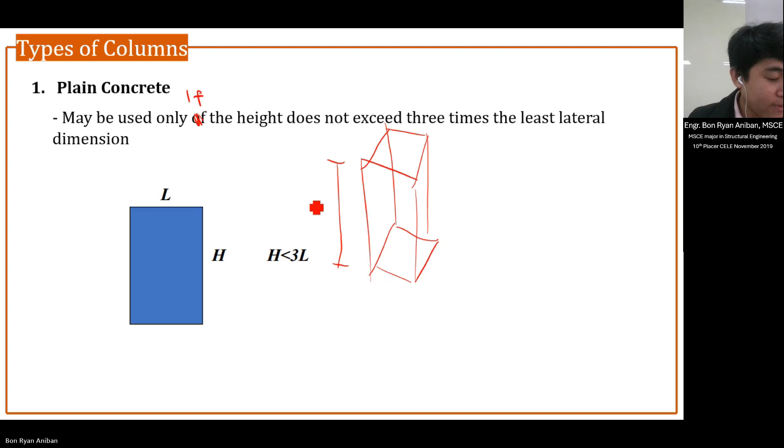We have plain concrete, used only if the height does not exceed 3 times the lateral dimension. For example, you have here a certain column, and if this height does not exceed 3 times the lateral dimension, whichever is lower, so if H is less than 3 times L, that could be considered as plain concrete. You don't have to put any reinforcement.

Longitudinal bars, you don't need to put lateral ties either. So usually it's called pedestal. Concrete pedestal, you don't necessarily need to put any reinforcement.

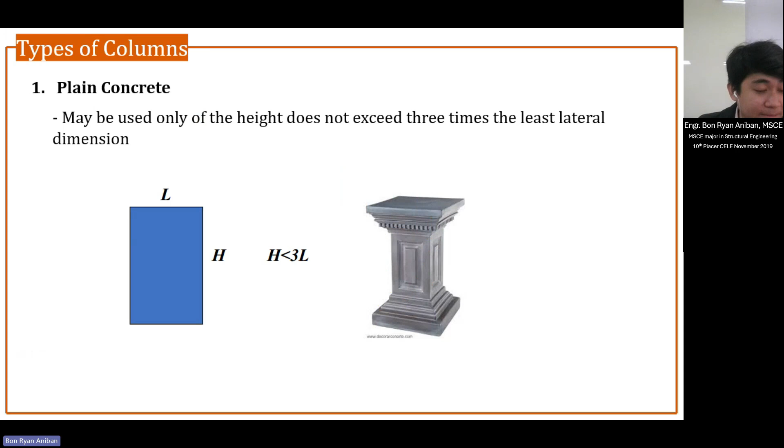We also have tied column, which is already the reinforced column. So earlier that is plain concrete, now this one is a reinforced column. We have a tied column in which the longitudinal bars are braced with a series of ties.

So this is your longitudinal bars, and then you have a series of ties. Parang stirrups ang katumbas niya, class, doon sa ating reinforced concrete beam. So we have different ways to put the lateral ties.

So we have these closed ties. We also have here ties doon sa mga interior na longitudinal bars. But we can also create a tie column na circular. Circular, so yung ties nila is also circular ties.

So a tied column composed of series of ties, kaya tied column. On the other hand, we also have spiral columns, a column in which the longitudinal bars and concrete core are wrapped with closely spaced helix or spirals.

So earlier, class, yung ties ay close hoop lang siya. Ngayon, ang spiral is actually continuous, continuous yung ating spirals, with closely spaced helix.

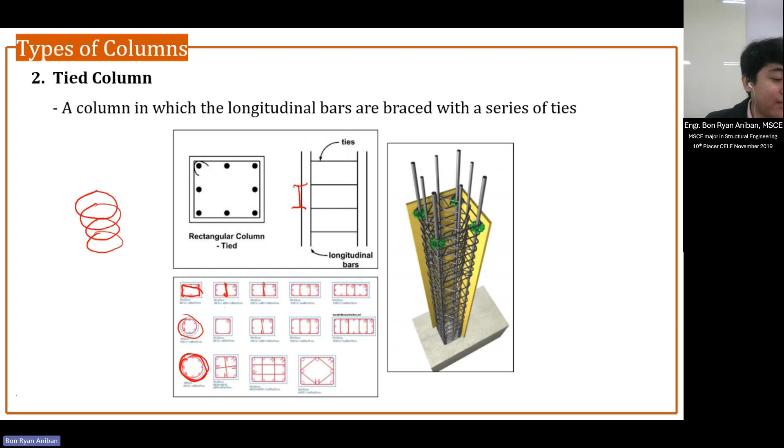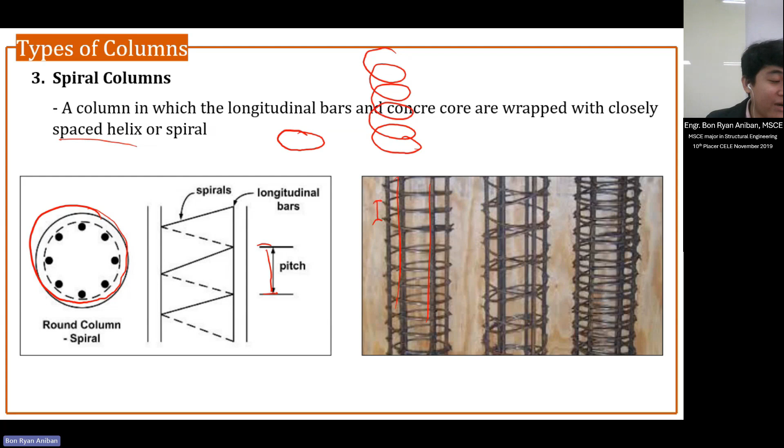So again, for this topic, we're going to solve the longitudinal reinforcement and the spacing of this transverse or lateral reinforcement. We also have composite columns, but we are not going to discuss composite columns here in reinforced concrete.

This topic will actually be discussed in steel design, class. So because this is a combination of reinforced concrete column and steel members. Minsan nasa loob siya, usually talaga nasa loob siya, tapos papalibutan mo siya ng concrete sa labas para hindi rin mangalawang, para hindi siya ma-expose doon sa environment.

Of course, this is stronger than steel alone and than concrete alone. So yun yung composite columns.

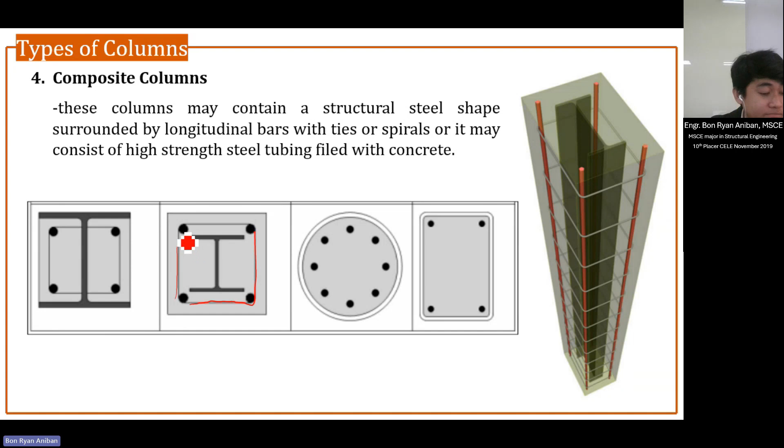But how do we design reinforced concrete columns? On the design of columns, the capacity must be greater than the factored axial force. It should be greater than the factored axial force. So we're done with this.

Design of beam flexure, we're done with this. Design of shear reinforcement, and this one, torsion reinforcement. So this is the only one left for us, class.

Okay, for the design strength, the capacity must be greater than the factored loads PU. So we know how to calculate the PU from your frame analysis, from your structural analysis. You can identify the actual load acting on your column.

Let's say you have a frame, a portal, that is simply supported or fixed. Basically your goal is to get, as you cut this section, the reaction at the support. At the reaction at the support, you have here an axial force acting here.

Okay, let's say we have a two-story structure. Which you will do on your plate. You are going to analyze it, cut this portion, and expose the internal forces acting on the endpoints of that column. So axial forces, kasi yun yung kailangan natin i-design. Actually, beam also experiences bending and shear, column also experiences bending and shear. But for now, we are only considering for the design the axial force lang, ibig sabihin walang bending moment, or we treat the column as simply supported.

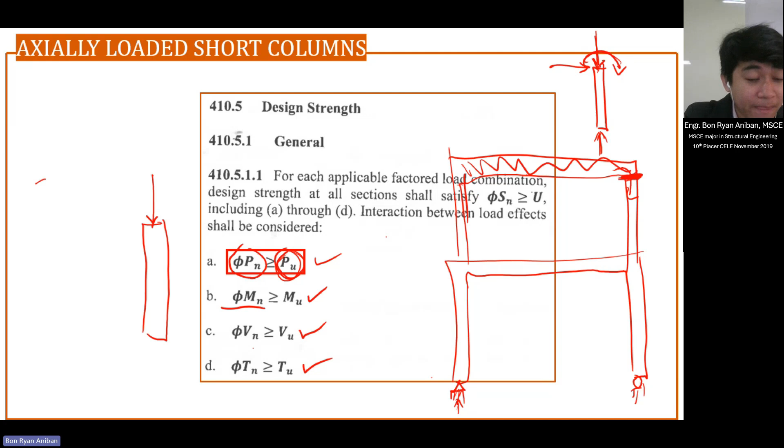Kasi kapag fix yan, guys, tulad nito, continuous yung buhos. Usually kasi pag gagawa ng structure, ang buhos ng beam ay sabay doon sa column. So they are monolithic, therefore the connection is considered as a fixed support. So therefore, there will be a moment between the framing, between the connection of your frame, column, and beams.

So saan lang meron talagang axially loaded column? Yung mga simply supported beam. Pag nag-transfer kasi yan ng load, okay, it is treated as a column. So yung reaction dito, class, is axial force lang doon sa ating column. So ano yung mga structure na yon?

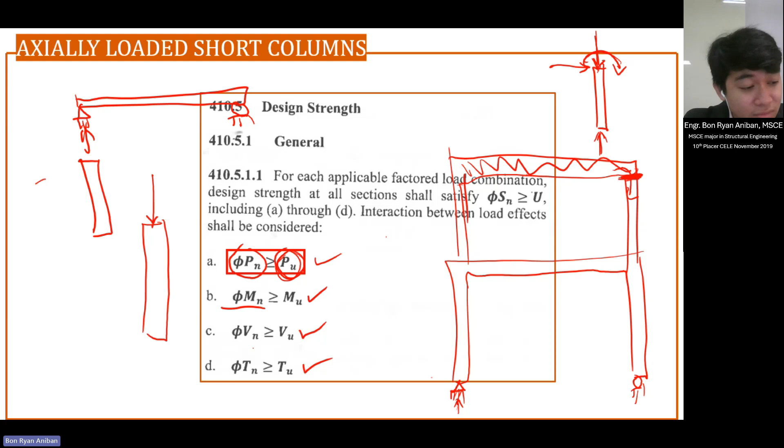Na may column ka, tapos pinapatong lang yung mga beam. Okay? So what do you think, yung mga ganong structures, guys? Do you have any idea kung ano yung ganong structure, yung ipapatong lang yung mga beam doon sa mga naka-ready na column. They are not monolithic, ha? Nakaabang na yung column. So what do you think, class, anong type ng structure yun?

Skyway kasi, yung mga skyway na yun, class, yung mga beams dyan is pre-fabricated. Dadali niyan dyan, buo na. So ibig sabihin hindi siya monolithic, may nakaabang na lang na bakal dyan. Tapos yung butas nito, hindi siya yung butas ng beam mo na pagpapasukan ng bakal, may konting gap yun, hindi saktong-sakto yung hole doon sa rebar na papasukan, may mga nakaabang na rebar dito. Therefore, it has a tendency to move horizontally, so may allowance siya to move horizontally, and that is a simply supported.

Okay, so kaya yung mata-transfer doon sa mga column class, yung mga column na dinesign sa mga skyway na yan, sa mga bridges also. Bridge, simply supported din yung class. Ano pa ba? Yung mga LRT, yan, yung mga train tracks. So yung mga elevated train tracks, simply supported din yung mga beams nun. So yung mga column nun, class, only resist axial force. Yung mga column nun magkabilaan yun actually, di ba? Mga column nun may papatong dito na beam, beam dyan sa kabila. So they only resist axial load, or the load is directly acting, okay, on your column. Axially loaded column, yung mga ganun class.

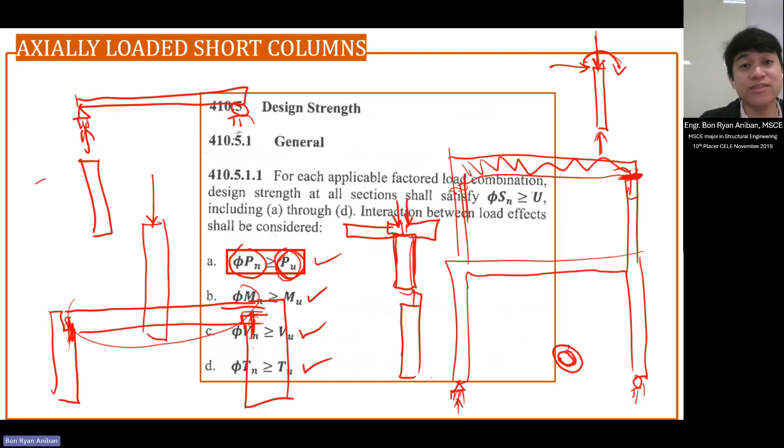But if you are going to analyze a structural frame, analyze ka ng bahay, moment resisting frame, so there will be a moment doon sa mga end columns natin. Okay, so that will be discussed doon sa mga susunod pa nating meeting. Okay, so you already know, no, the difference of what is axially loaded columns. Kasi we also have eccentrically loaded columns, yun ay may moments.

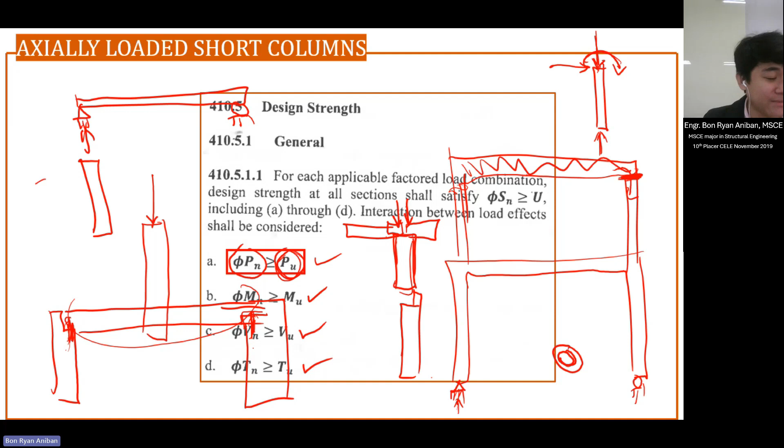So now, how do we design? How do we design that capacity? The capacity of the axially loaded column must be multiplied to the reduction factor. So what is the reduction factor for purely axial column? Purely axial, wala pa tayong bending moment. So for the purely axial column, of course for spiral column...

...that is 0.75. And then for tied column, itong other refers to the tied column. Okay, so lista lang natin. So for phi Pn, okay, the value of P, at least gawa tayo ng list, guys, for tied column and for spiral. Okay, for the reduction factor, okay, for the tied column is 0.65. Now for spiral, 0.75. Actually, this table was already presented, okay, during the discussion of the beam.

Kasi ito rin yung ating reduction factor. Okay, so di ba may compression control section for beam, tension, transition, tension? Kasi beam is subjected to moments, no? So dahil sa moment na yun, nag-iiba-iba yung strain ng ating reinforcement. However, for purely axial, yung strain mo dun sa reinforcement, yung mga bakal mo, is actually being compressed, so they're purely compressed. That's why your strain, tensile net strain, is less than the yielding but in compression.

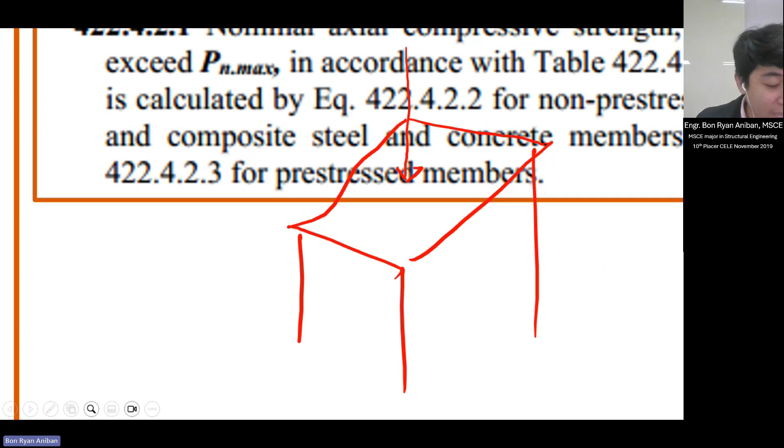So how did NSCP came up with this formula? Now let's check, kasi this is axial capacity, no? Since this is purely axial, therefore the resisting forces will be on the entire area of your concrete.

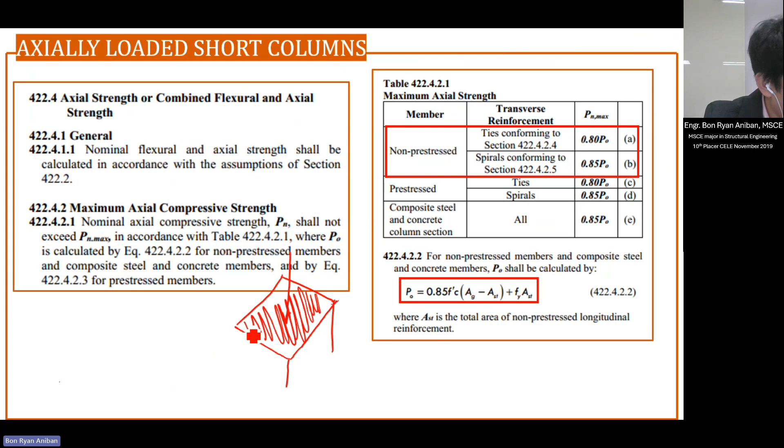Now, if this is subjected with the axial force, so the cross-sectional area will resist. So ano yung magre-resist dyan? Yung pure area neto, guys. Yan, yung buong area niyan yung magre-resist. So paano ba yung force given by this area? Diba that is stress times the area? You know how to do this, no?

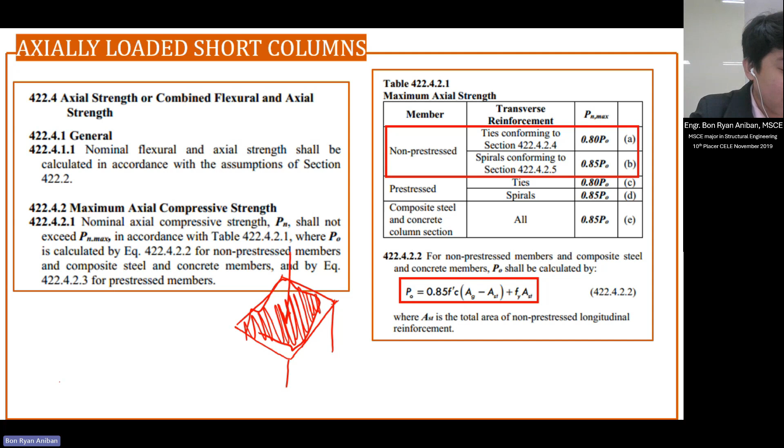From the analysis of singly reinforced and doubly, stress times the area. So what is the stress being experienced by the concrete? Diba, we have to have a uniform stress. Okay, that is 0.85 FC prime times, ano ba yung area nito? Area ng gross. Okay, so from beam, that is 0.85 FC prime BWD, di ba? Dito, we use area ng gross.

Eh sir, bakit minusan ng AS? Because that is to account, kasi may butas yan eh, di ba, dahil sa mga steel, area ng steel. Hindi naman talaga buong area ng concrete to eh. Okay, may bawas na yung concrete natin because of the area of the steel reinforcement. So you have to reduce it by the area of steel, area ng gross minus area of steel. Kaya yung total force given by the concrete is 0.85 FC prime, area ng gross minus area of steel.

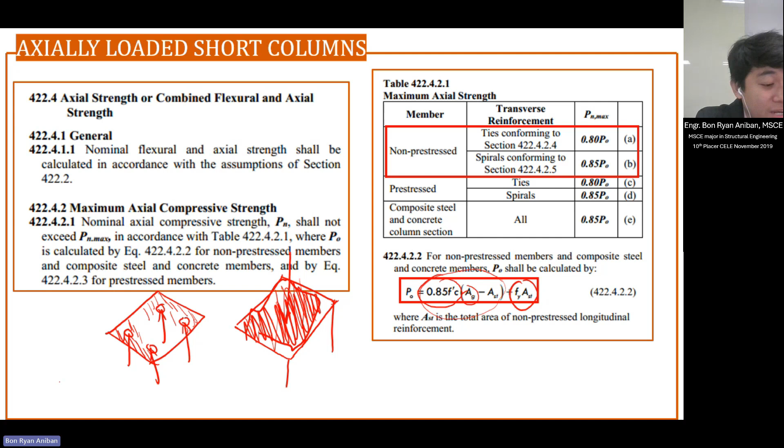Then, since yung force aside from the concrete, magre-resist din class yung area of the steel. May binibigay din forces yung mga steel. Okay, but how do we solve the force given by the steel? Diba AS Fy? So we assume that this is already yielding, yielding in compression. Okay, so yielding sila in terms of compression. So AS Fy, that's how we get the capacity PO.

Okay, parang ito class yung 100% capacity. But for the safety purposes, kasi when there is an eccentricity, okay, halimbawa, yung ating force, halimbawa 100 kilonewton yung na-count natin. But that one, halimbawa, nandito yung 100 kilonewton. But that 100 kilonewton is not actually directly acting on the centroid of your cross-sectional area. So therefore, that 100 kilonewton is more than that, no?

Hindi talaga siya 100 kilonewton. Kasi kapag nilipat mo yan doon sa centroid, for us to have a uniform stresses kasi, dapat yung force mo is acting to the centroid. Now, therefore, kung ililipat natin yan dito, magkakaroon ng eccentricity, so there will be a small moment acting.

Now, to account that moment, to account that eccentricity, ang gagawin natin, we assume that the capacity is smaller than the actual 100% capacity. So you multiply your 100%, this is actually the 100% capacity of your axially loaded column, with some safety multiplier. So 0.8 for tied, 0.85 for spirals. So imagine, 20% yung nabawas sa tied column, and for spiral is 15% only.

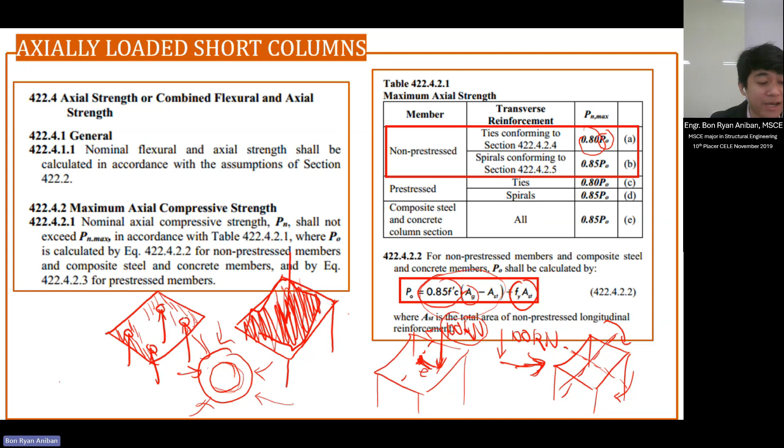That's the difference between tied and spiral, and how to get their capacity, phi Pn. You have to first get the reduction factor and Pn — they are different depending on whether it's tied or spiral. But for the calculation of Po, it's the same for both, class.

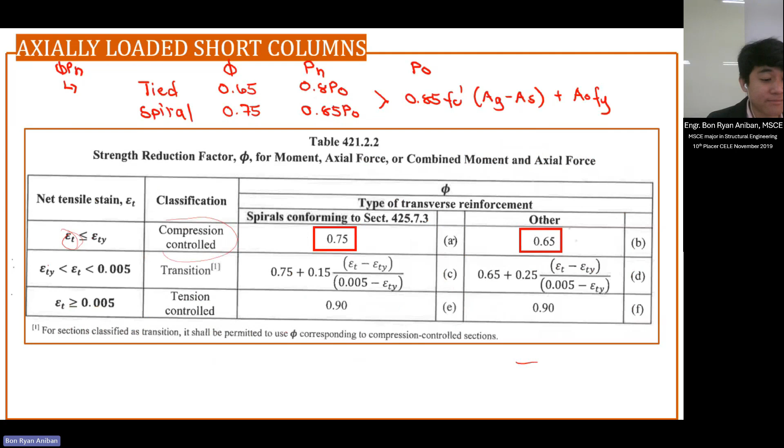And then we also have provisions for the reinforcement — for the spiral reinforcement and tie reinforcement, and for the longitudinal reinforcement. The area of longitudinal reinforcement shall be at least 0.01 times the gross area, and shall not exceed 0.06 times the gross area. It can't go beyond that.

It goes down to this and up to this. So AS should be in between — greater than 0.01 times the gross area, and it can be in the middle, up to 0.06 times the gross area exactly.

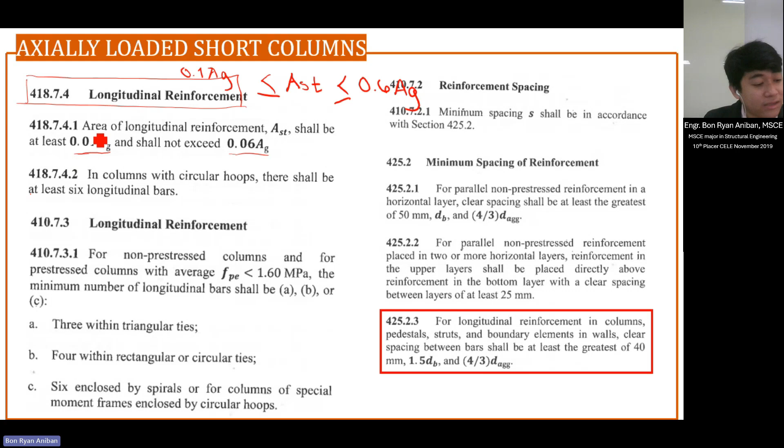So what are these 0.01 and 0.06? Well, if we try to derive that — for example, 0.01 Ag is equal to AST. Let's try to solve this: 0.01 is equal to AS over AG, area of steel over area of concrete. Does the formula look familiar? This is from when we analyzed beams. Does it look familiar, guys?

So what did we call this when we analyzed beams? We call this the steel ratio — steel ratio of the beam. But now, because steel ratio for the beam is AS over BD, that's not gross area. Here we consider the gross area — we don't have to remove the concrete cover, diameter of the stirrups, or diameter of bar over 2. So that's for the beam.

But these values ranging from 0.01 to 0.06, we call that ρg — steel ratio in gross. So the gross steel ratio should be greater than 0.01 but less than 0.06. When we design, we have to check that.

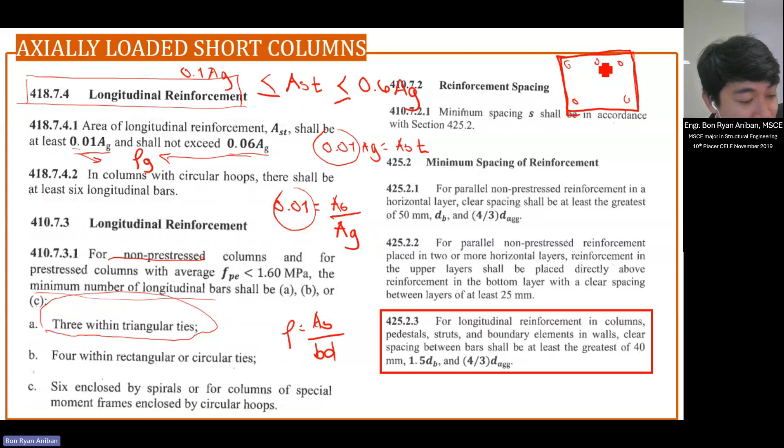Tapos gusto mong maglagay ka ng bakal, na ganito ang ties, tapos maglagay ka pa ng triangular ties. So at least sabi doon sa triangular ties, may 3. Minimum of 3. Pwede mong tanggalin ito, wala na yan, ito na lang 3. Basta as long as you create triangular ties or triangular column, the minimum number of longitudinal bars inside that ties is 3. Okay, next, for within rectangular or circular ties, ties pa lang ang pinag-uusapan natin, ha.

So 4 daw, kasi pag rectangular yan, class, of course yung ties mo ay rectangle din. So dapat kada corner ng ating ties ay may longitudinal reinforcement. And for circular ties, again, di ba nga yung circular column can be tied or spiral. Now for circular ties, 4, okay.

Pero pag spiral, di ba circular din yan? Pag spiral, 6. Okay, so I hope clear yun guys ha. Pagka circular ties, 4. Pagka spiral, you don't have to mention na circular spiral yan ha, pag spiral column, okay, that should be 6, minimum of 6 reinforcement. We now know the minimum number of bars.

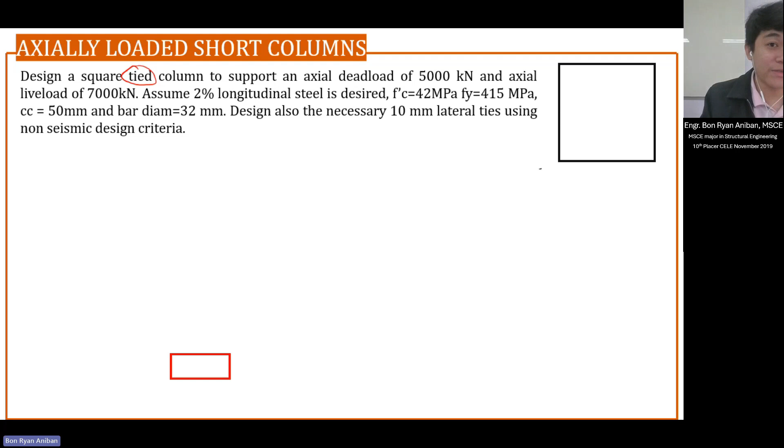Pagka we consider seismic criteria, kasi class, may horizontal force na yun eh. Okay, so for this, we don't consider yet the seismic criteria. Okay, so we will consider that if may mga lateral force na tayo.

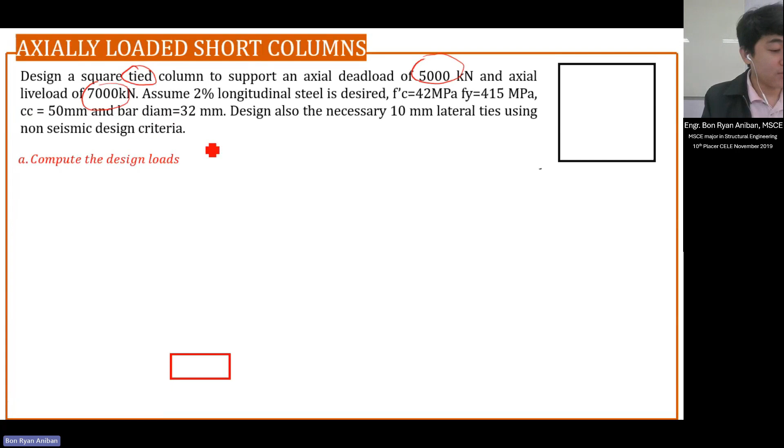Okay, first is you have to compute the design loads. So given sa atin is the dead load and the live load. So for the computation of the design load, the PU, I have to solve the PU. Okay, so PU, diba, if you have dead load and live load, let's combine this. Actually, we have another load combination, 1.4 of dead load alone, but the answer there is less, because if we're going to compare that, technically, you have to compare all the load combinations. But mostly, ang nag-govern is the 1.2 dead load plus 1.6 of the live load, kasi if you are going to solve this 1.4 dead load, okay, unless wala kang live load, no?

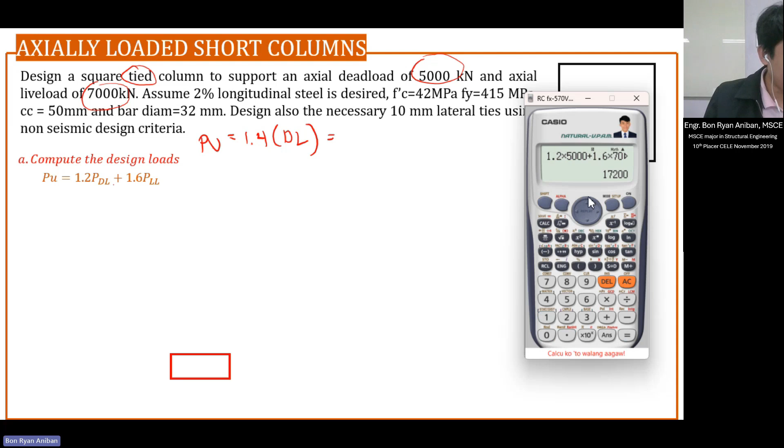So if you don't have any live load acting, pero in reality naman, lagi may live load, diba? 1.4 dead load, but no, if ever na nag-a-act lang yung dead load, so ito yung magga-govern. So 1.4 dead load is 7,000. However, if you're going to use the second load combination from NSCP, 1.2 dead load plus 1.6 of live load, so that is 7,000, ayan, 17,200. So this will always govern, so kilonewtons.

Now, for the design, we just have to equate this to the capacity of your section. So the capacity is phi Pn. So ano nga yung reduction factor, class, for tied column? What is the reduction factor? So the reduction factor is magkaiba yung reduction factor class for tied and spiral. So okay, so the reduction factor for tied is 0.65. So ibig sabihin, malaki yung nawawala doon sa ating PN. Kaya dito, malaki na yung nawala, 0.8 eh, tapos binawasan mo pa ulit, diba, ng ilan, 35%. Dito, nabawasan ka ng 20%, binawasan pa ng 35%.

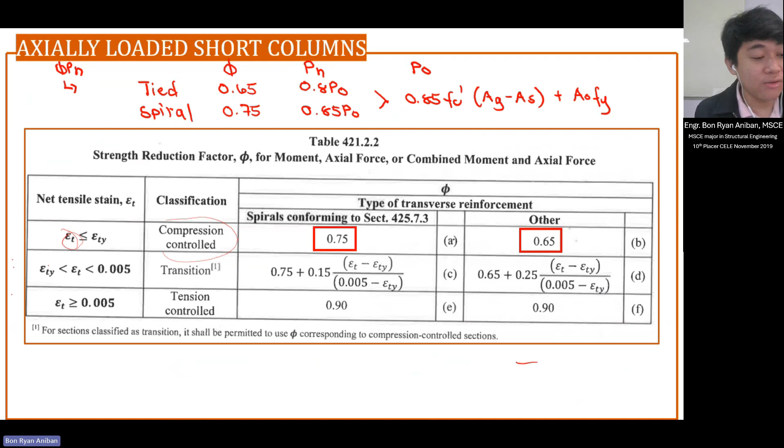Yeah, no, we just equate this to the reduction factor 0.65 times PN. PN for tied, tied column ang sinusolve natin, is what? 0.8 of PO. Then PO is equal to what? 0.85 FC prime, area ng gross, minus area of your steel, plus area of steel FY. You multiply this all to 0.8 and 0.65. Okay? So ayan na klase, magiging equation natin, and reduction factor is 0.65.

Okay, so let's check. So we are going to design the area of the gross kasi it is not yet given, but we know that this is a square. So the dimension is x by x, ba? So x, let's say x by x, so let's say x is unknown. We want to identify the dimension of this column. However, the area of steel is also unknown, it is not mentioned on the problem, the area of the steel. So therefore, dalawa yung unknowns natin dito, class, for just one equation.

We need another equation to solve two unknowns. So how do we get, but first let's solve AG. But how do we get this AST? In terms of AG, earlier we discussed that there is what's called steel ratio, gross steel ratio.

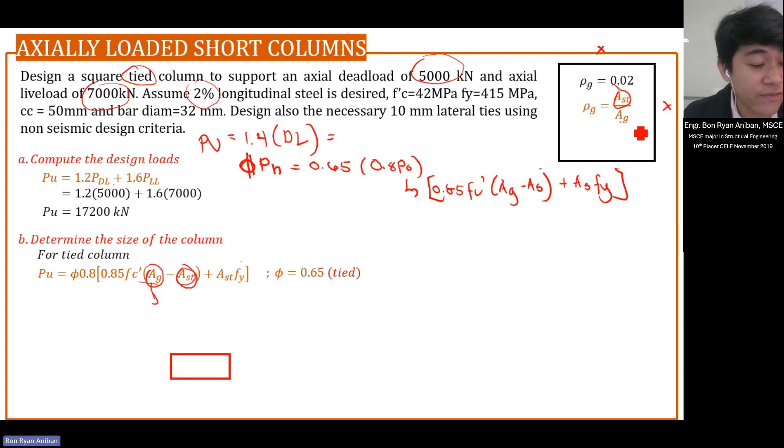And that's given here, class. Assume that 2% longitudinal steel is desired. So our steel ratio is 2%. So, Rho g, gross steel ratio is 0.02, and that is equal to AS over AG, right? Now, we just solved AS in terms of AG, so that's why we have AST is 0.02 times area of the gross.

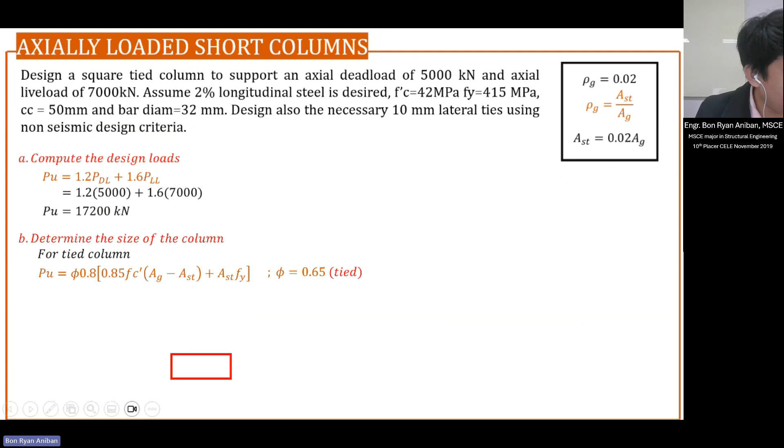So we will just substitute that into our equation, and the unknown is the area of the gross. So we substitute 17,200, but we convert this to newtons, because take note that this equation is from NSCP, and if that is a force, it will give an answer in Newtons.

So let's substitute. We have the reduction factor of 0.65 times 0.8. You have to multiply all of this because usually students make mistakes here. Only this part gets multiplied. So make sure, the technique might work, but you need to do shift-solve here. So all of this should be multiplied by 0.8 and 0.65.

So multiply: 0.85 times FC prime, area of gross, which is unknown, area of steel, which is 0.02 times area of gross, plus AS, times FY. AS times FY, the yielding stress of the longitudinal bars, because if we have FYT here, that is the yielding stress of the transverse reinforcement. So don't get confused, but we're designing the longitudinal bars, so therefore you use the yielding stress FY.

Upon solving, if you are going to solve the area of the gross, you can solve this value. That is the area, but we want a dimension for this column. For the dimension of the column, we just have to take the square root of this, since it's a square column.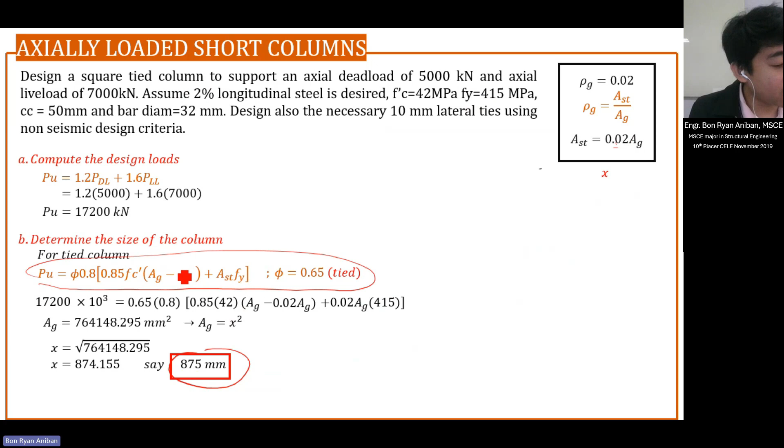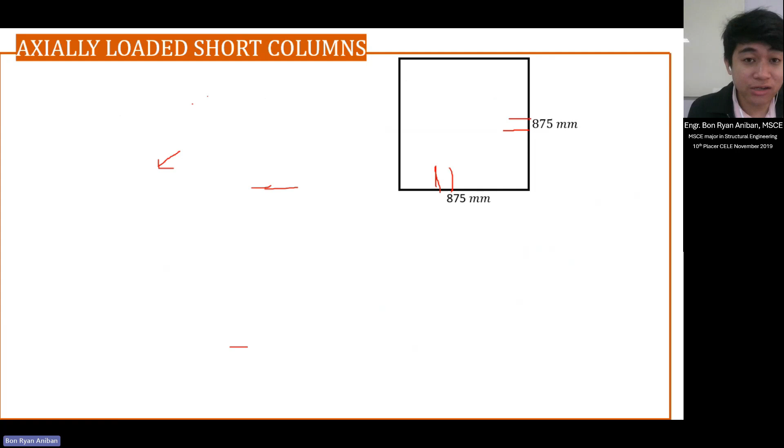Okay, let's try to do that. Now, we are going to use again this equation and then solve the AS. So solve natin ulit, class. Let's use again the formula, but now we are going to solve using 875 by 875. We are now going to solve the number of the bars or reinforcement. So let's try to solve this.

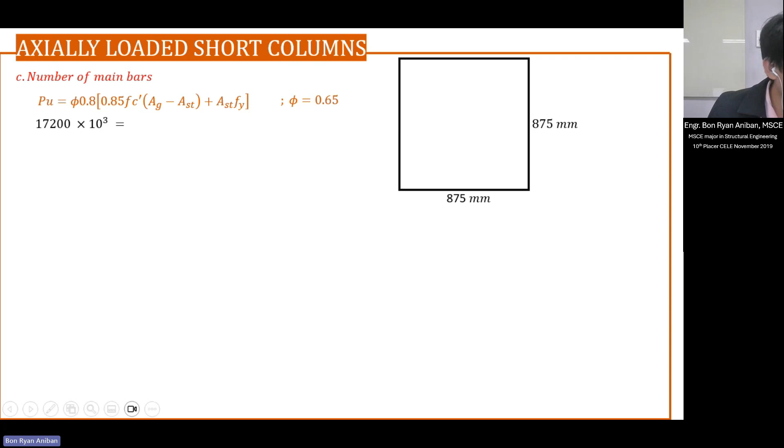Substituting the area of gross, 875 by 875, not the 76 — hindi nyo kailangan i-store to. So let's substitute, ito pa rin yung formula natin. We're actually dealing with a tied column, 0.65 ang reduction factor. Let's substitute, and then we still use the same loads kasi we just want to satisfy this load. The capacity must be equal to the applied load.

Okay, so let's substitute: 0.65 times 0.8 times 0.85 FC prime, area ng gross natin ngayon is 875 squared minus area ng steel, which is unknown, plus AS Fy. We put times 10 raised to 3 here para maging Newton so that both sides of the equation ay naka-Newtons. So what will be the answer here? So for the AS, the answer is equal to, ayan. So next thing to do, of course, you now calculate the number of bars.

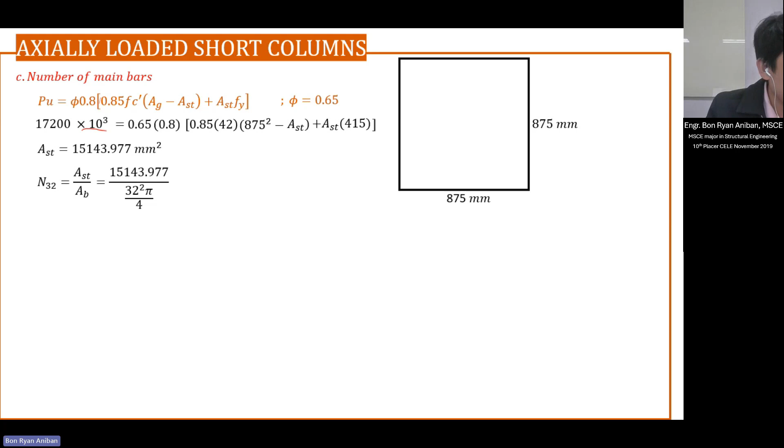So from the problem, we are going to use the diameter of bar. This is still the same how you compute the number of bars. We are going to use here 32 millimeter diameter for your main bar. So you just divide the area of the steel by 32 squared pi over 4. So how many bars are required? Again, the minimum number of bars.

This is a rectangular column, no, 4. If your answer is 2 point something, you round up to 4. If your answer is 1 point something, you round up to 4. Round up, for sake, round up lagi tayo pag number of bars. So your answer is 18.83. So what's your answer?

What should be the answer? Mali ang 19. Yes, 20. 20? Bakit 20, sir?

Okay, so ganito, class. Square column kasi to, so unless circular column siya — square kasi to, unless that is circular — kasi you can't evenly distribute the 19 pieces. It should be evenly distributed kasi. The longitudinal bars should be evenly distributed. Yung 19 kasi, class, hindi mo pwedeng evenly o equally i-distribute. Okay? So ganito kasi yan, class.

Equal bars kasi square to eh, it should have an equal number of bars per face. So once you design a square column, it should have equal bars. Kasi pag hindi equal yan, magiging weak siya sa other axis. Okay? So kawawa naman yung side na yon, no?

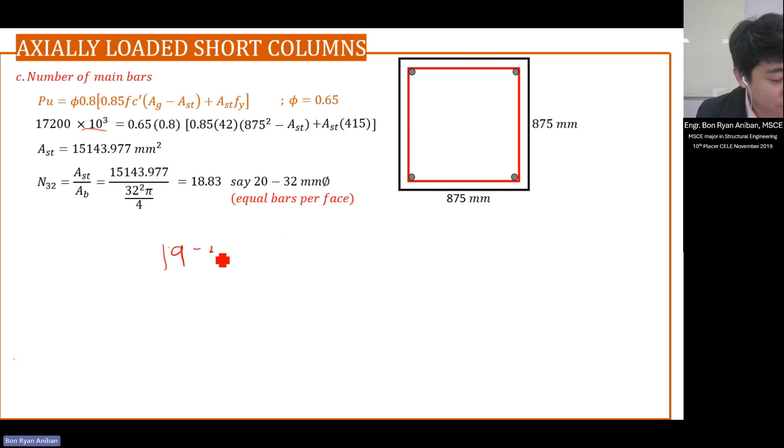So ganito, class, para malaman mo kung ilang bakal, you just put first, okay, 4 pieces of bars doon sa ating corners. Then after that, bawasan yung 19 mo, minus 4, okay, e di 15 yan. Is that divisible by 4? Kasi ihahati mo sa 4 eh, no? Is that divisible by 4? Hindi. Kaya, tinaas mo ng 20.

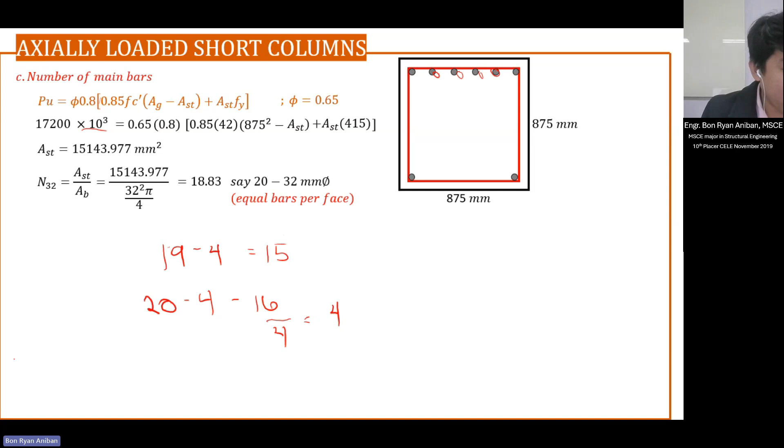Minus 4, okay, 16. Yung 16, i-divide natin ng 4, so 4 ang answer. So may natitirang tig-4 pa na ilalagay kada face. Maglagay dyan ng 4, lagay ng 4, 4, 4. So we have a total of 20 rebars. Okay? 20 rebars.

Kaya hindi 19 ang sagot. Okay, so 20 rebars equal bars per face, if that is a square column.

Now, what are the checks that we have to do here? Kasi di ba sa beams, we check the cross-section for the design of stirrups, and then the serviceability check. What else? Even so shear, we have to check the cross-section dimension. If that is fit, the reinforcement will fit. Serviceability, we have to check if the actual deflection will not exceed the allowable deflection.

Now, we also have design checks here. So what are those? One of the most common design checks, if this is just an axially loaded column. Pagdating kasi sa eccentrically loaded column, we have a lot of checks there. But for now, ito lang muna ang gagamitin natin. For the design checks, as per the NSCP, the steel ratio must be greater than 0.01 but less than 0.06. We have to confirm it kasi we made some revisions eh.

We round up your dimension, you round up the number of bars. Okay, so you have to check this. AS over AG. Your AS is not this one kasi you round up eh, so you have to calculate the new AS. Your AG is 875 by 875. Just substitute. You have 20 pieces of bar, 32 square, pi over 4, over 875 squared.

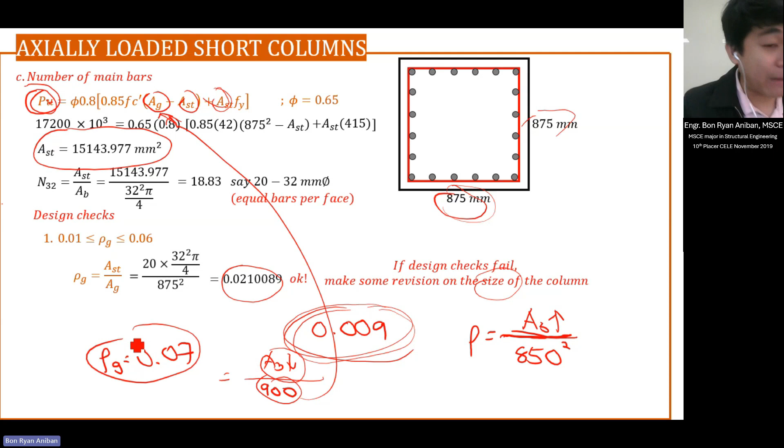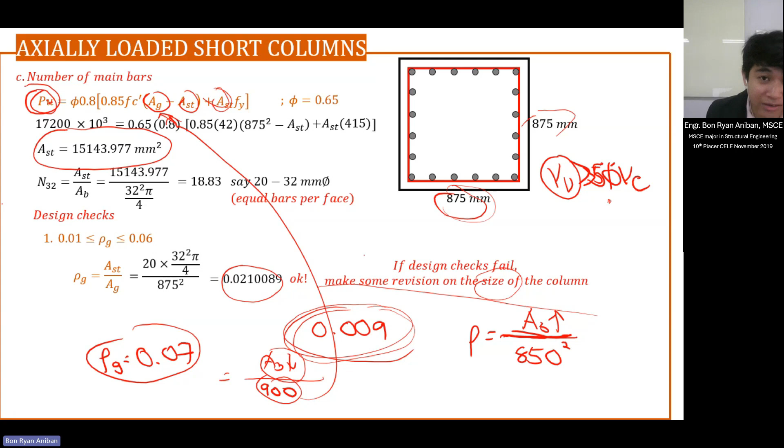You have to decrease, because in shear reinforcement, if it fails, if VU, our shortcut, is greater than 5φVc - which comes from 2/3 of BW square root FC prime BWD, this 5φVc is derived - then if VU is greater than this, the solution is just to increase the beam dimension. That's it, because if you decrease it, it will fail even more. That's it. But here class, you have a choice: you will increase it depending on the result. Okay, so that's the first design check.

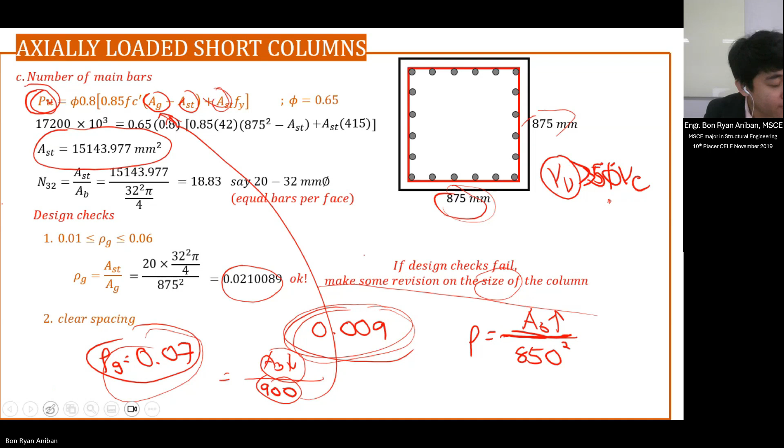So what else? Okay, clear spacing - we have to check if these are spaced evenly and above the minimum standard, as per code. So the minimum spacing between the bars - remember the minimum spacing in beams? Required minimum spacing for the longitudinal bars - there are two, actually three. There's also the diameter of aggregates, but we don't consider that anymore. So what are those two, class?

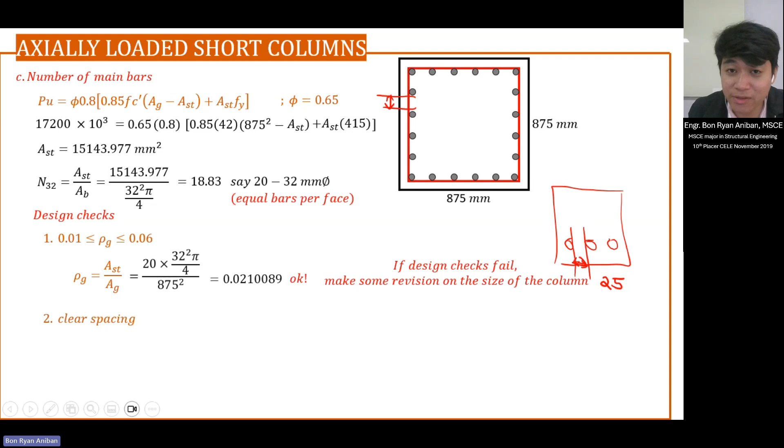The minimum dimension of the bars - is that 25 or what? The diameter of the bar. Okay, there are two, right? 25 or the diameter of the bars. Okay, so just select the larger.

However, for the clear spacing of horizontal reinforcement, this is it. For the longitudinal reinforcement in columns, this is what we used last time - oh wait, this is wrong, right? It should be 25. Okay, for the parallel, non-prestress reinforcement, horizontal layer.

For vertical, class, for longitudinal reinforcement in columns, the spacing between the bars - this is correct - 40 millimeters, 1.5 diameters of the bar, and 4/3 times the diameter of the aggregates. But we can just neglect this because we do not know the diameter of aggregates during construction - we're not sure. So just select between the 40 and 1.5 times the diameter of the bars. Okay, so let's compare what will be the minimum requirement of the code.

For the minimum requirements of the code, just select between the 1.5 and 40. Our bar diameter is 32, so that is 48. Okay, so just select between the two. Of course, this is the minimum.

But here, I think the concrete cover given is 50 mm. That was given. But again, the minimum concrete cover is 40 mm. Here it's given as 50 mm. Minimum is 40 if not given.

Okay, so 2 times concrete cover plus the diameter of the ties - ties is what we call this. Let's just get this. Then you have 1, 2, 3, 4, 5, 6 bars. And then how many spacings? 1, 2, 3, 4, 5, 6 spacing - no, 5. 1, 2, 3, 4, 5 spacing.

So we can now solve for S1, and that S should be greater than the minimum provided by the code. The answer is 112.6, and that is greater than 48. So, therefore, okay guys, it's safe.

What if the design check fails? Use bundled reinforcement, or you may increase the diameter of the bar. Okay, use bundle or increase diameter. So you may increase the diameter of the bar or use bundle reinforcement. What do we mean by that? Bundle reinforcement - actually that's the second option. The first option is to increase the bar dimension.

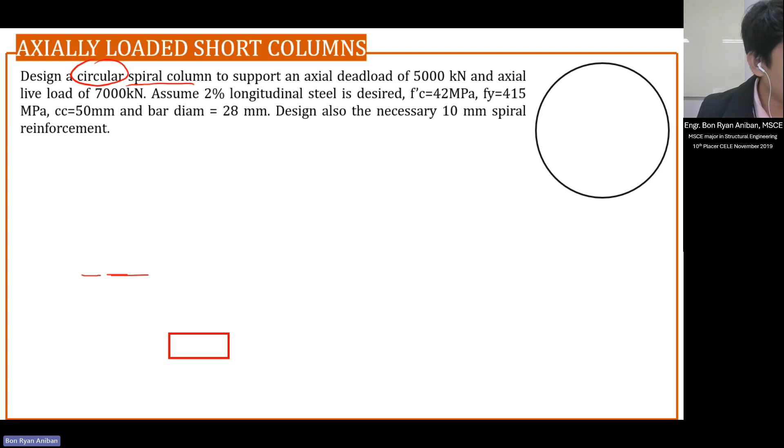Design the circular spiral column to support an axial dead load of 5,000 kN and an axial live load of 7,000 kN. Same load as before, same setup too - we just changed the diameter of the bar. Design the necessary 10mm spirals.

Design also the necessary 10mm spiral - the spacing of the spiral. Aside from the longitudinal bars, we also need the spacing.

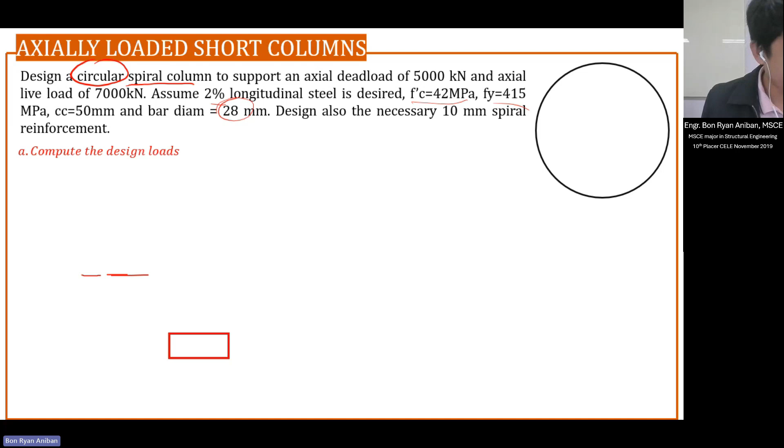First, we have to design the loads: 1.2 dead load - this is still the same. Next, you have to equate this to the capacity. What is the reduction factor for spiral?

It's higher - 0.75. Okay, what is the PN of spiral? Higher too - 0.85 of PO. What is the PO of spiral?

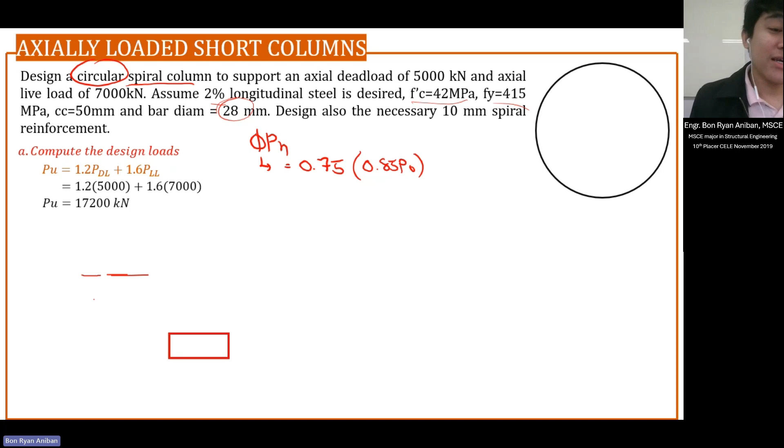Same as tied column. AS, 0.85 FC prime, area of gross minus AS, and then plus AS FY - combination of steel and concrete. So we can substitute now.

We don't have AS yet - two unknowns again here, but we have a longitudinal steel ratio. So we just equate this to the same equation as before. What changes, class, is really just the 0.85 and the reduction factor.

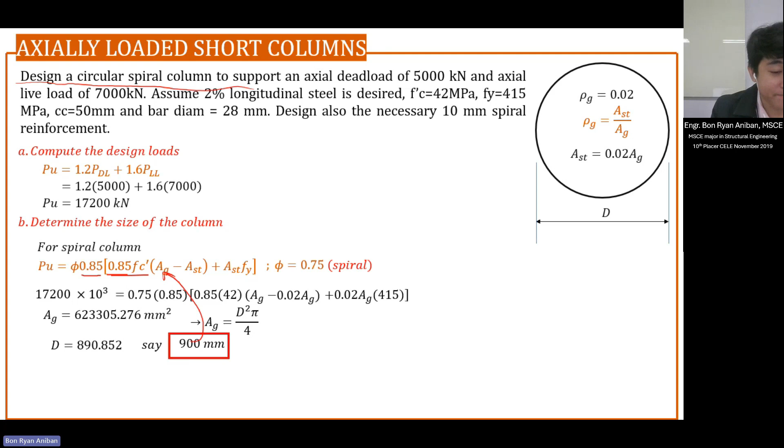You have 900 millimeters. After that, plug this back into the equation and solve for the AS. This won't be used anymore - maybe that will be used. Solve for the AS, plug it again into that equation.

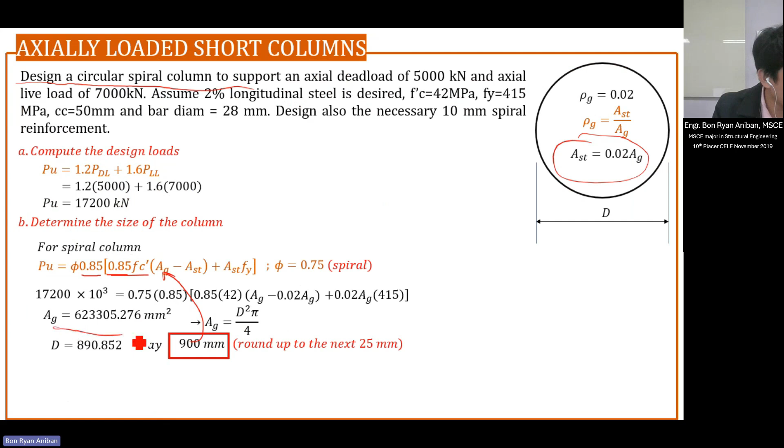And the AG now is the area of the gross based on the 900 millimeter diameter of the column - 900 is what we used. Don't use the other AG - forget that one, class. This is what we'll use for the area of the gross, minus AST plus ASFY.

So what is the value of AS? That is 11,255.03. So you solve the number of bars - AS over area of bars.

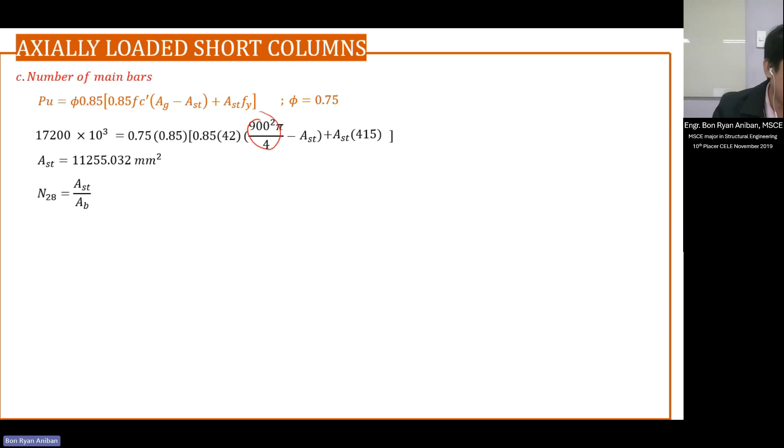We are going to use 28mm. Your answer here, class, is 18.279.

Say 19 pieces. 19? Why not 18, sir? Earlier our answer was 20, right? We round up - this is a circle, guys, there's no face, no side to a circle. Right?

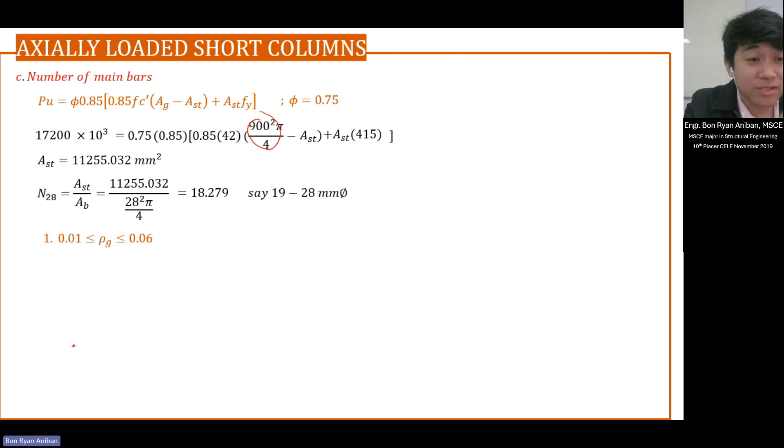19, because you can distribute it equally along the side. Unlike earlier, it had to be equally distributed because it was a square column - unless you're short one and one side lacks a bar. So 19 pieces is the answer. You just round up, no need to think about it further, class. As long as it's circular or spiral, just round up - you don't have to think about making the faces equal. No, just round up, that's the answer.

Okay, if it's circular - circular, tied, or spiral - just round up your answer.

Now you check the steel ratio if it still fits the minimum and maximum steel ratio - so 19 pieces, 28 millimeter diameter, over the gross area.

So class, greater than 0.01 but less than 0.06. Okay, we check the clear spacing. This is new, how do we check the clear spacing? The minimum clear spacing is still the same, 1.5 times the diameter of the bar and 40 millimeters. But how do we calculate the actual spacing? This is our minimum, 42 pala.

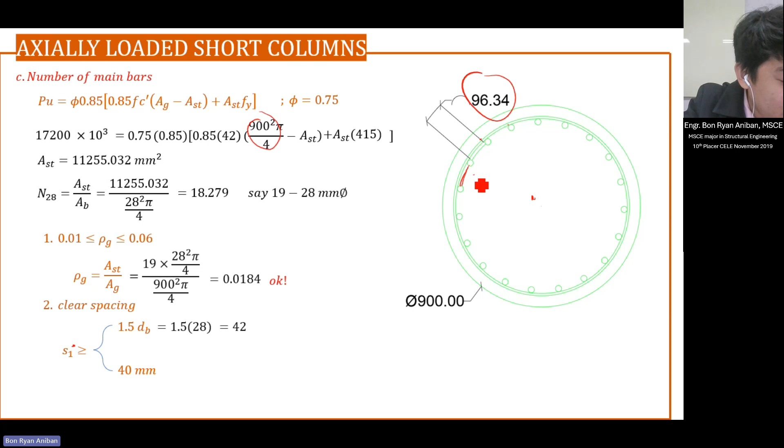CAD it out guys, it'll show. Okay, just get the polar, polar, then 19 pieces. How do we solve that, the 96.34? So the spacing between them should be greater than 42. So how do we solve this spacing? The spacing is arranged in a circle, guys.

So what you do, class, is get the circumference of this circular arrangement, measured to the center of your main bar. Get the circumference of that circle. So you need to get the diameter. What's the diameter here, guys? Measured to the center line of your main bar. Let's call this the small diameter, since we can compute the circumference if we know the diameter.

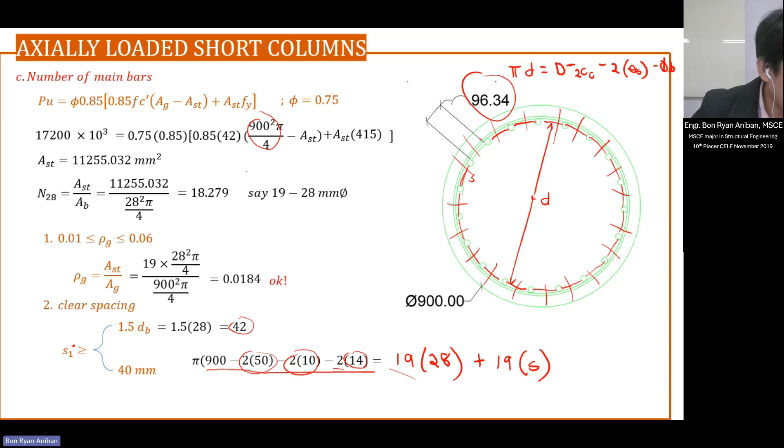For a circular column, whether tied or spiral, it's the same for circular columns. So, 19 spacings. Then you're now going to solve for the actual spacing. So what is your answer? equals 19S plus 19 times 28. Your answer is 96.34, which is greater than the minimum. So our design is okay.

Again, if the design checks fail, just bundle it or increase the diameter of the bar. But the first choice is increasing the diameter of the bar.

Okay, then you're now done with the design of the number of bars and the dimension of your column. We are going to use a 900 millimeter dimension of column, spiral column, and 19 pieces of 28 millimeter diameter bars. Next thing to do is to compute the area and the spacing of spirals.

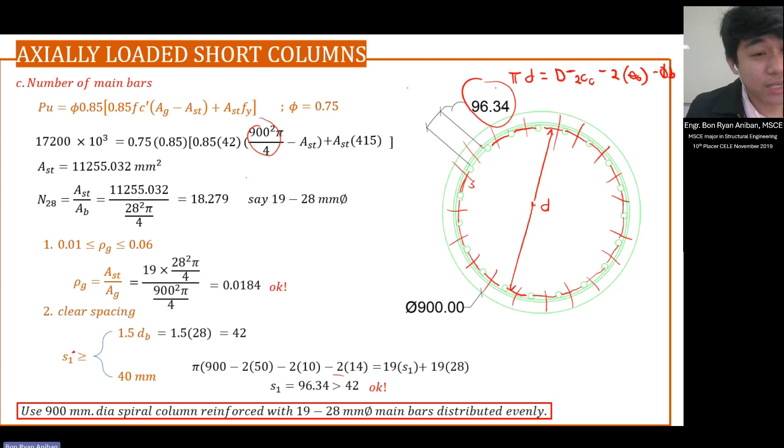Spacing of spirals, how do we compute the spacing? It is not the same as how we compute the spacing of the ties. This is how we compute the spacing of the spiral. You need the maximum spiral pitch, the spiral ratio, spiral volumetric ratio. The volumetric ratio is given by 0.45 times Ag over ACH minus 1, multiplied by FC prime over FYT.

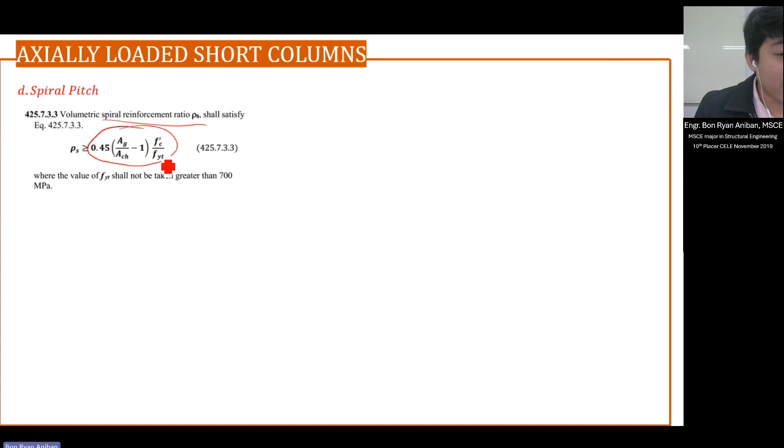So what do we mean by volumetric ratio? Consider this core, we call this the core. Core dimension, when we say core dimension, the concrete cover is removed. So you get the spiral ratio there in the core, the volume of the core, don't include this one. How much is the volume of the spiral over the volume of the core alone? This is the maximum spiral ratio, or rather the minimum, the minimum volumetric spiral ratio, because your actual spiral ratio should be greater than this. It should be larger than this value. So, we'll get, class, the volume of the spiral over the volume of the core.

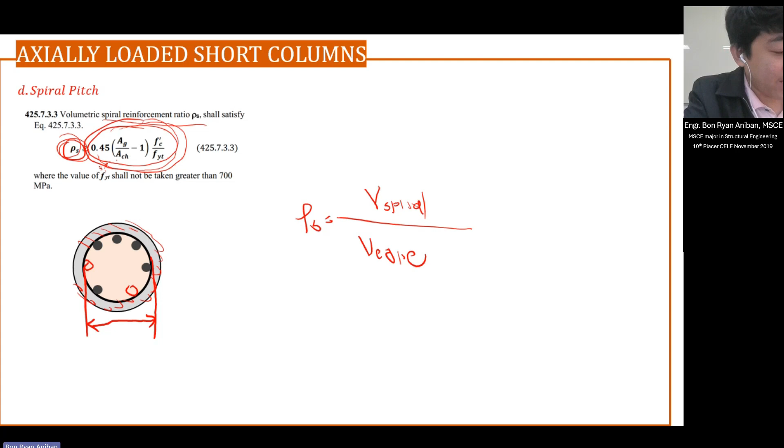Iyan yung magiging spiral ratio natin, na dapat mas malaki dito or equal. So, kunin mo na natin, class, itong tinatawag natin na minimum spiral ratio.

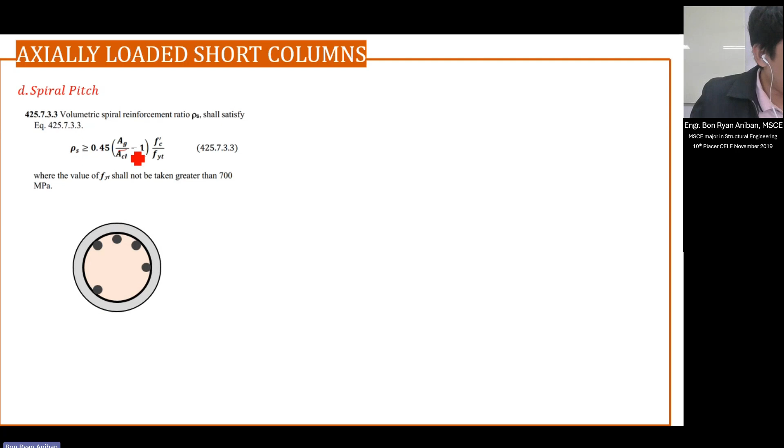Solve muna natin. Kailangan pala natin ng area ng core dito. So, how do we solve the area ng core? Just subtract. So, you have the area ng gross, bawasan mo lang, class, ng diameter ng concrete cover. So, that will be the diameter of the core. Now, to get the area of the core, ACH.

Yun, no? So, just get the area, no? Yan, ito yung area ng gross. Ito yung area ng core, ACH. You just substitute that to the equation.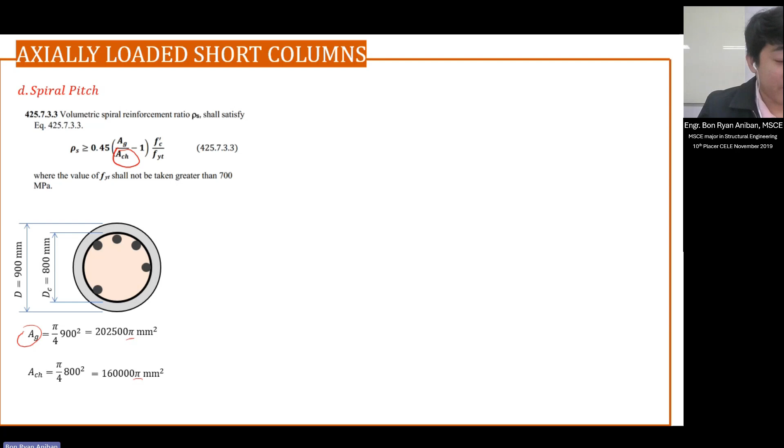Naka-in terms ako ng pi, no? So, hindi ko muna siya ginamit. So, you just solve 900 squared over 4. Substitute. Actually, kahit hindi mo na nga solve, tinignan mo pag sinubstitute mo yan, 0.45.

Okay, ganito mo na lang siya: pi over 4, 900 squared, over pi over 4, 800 squared. Diba? Cancel lang to. Kaya actually, pwede tong diameter ng gross over diameter ng gross squared, over diameter ng core squared.

Okay, so may minus 1 yan. Then you multiply it to FC prime over FYT.

Okay, FC prime over FYT ha? Kasi we're talking about here the transverse reinforcement. We are designing the spiral, that is transverse. However, sa given natin, it was not mentioned, yung FYT. Hindi siya binanggit eh. Hindi siya given. So therefore, you just assume that FYT is just equal to your FY, no? Pares lang sila ng value. Hindi mention eh. So, minimum natin, mas-solve that.

You store this value kasi there might be a discrepancy diyan kapag hindi naka-store. Okay. So, ito. Okay na to, na minimum na value.

So, how do we solve? Ito ang actual value. So, just need to get the volume of the spiral over the concrete core. Okay. So, you have to get the volume of the spiral. How do we get the volume of the spiral?

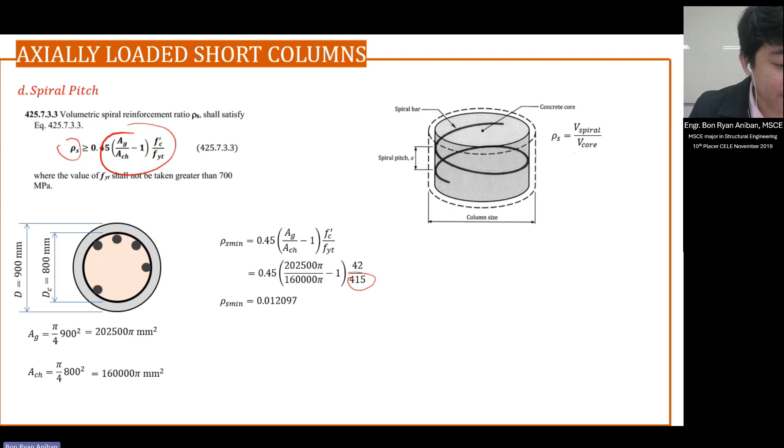Ang consider natin, kasi pag kinonsider natin yung buong spiral, buong column na yan, ang haba niyan. So, ang target kasi natin dito, guys, is yung pitch na ito, yung spacing. So, now, we are just going to consider the height equal to the one pitch, o yung isang ikot ng spiral. Imagine mo yung spiral mo, isang ikot. Isang ikot siya. Ayan, so bababa na naman ganyan. Isang ikot yan, class, ito. Okay, nakagawa siya ng one pitch. Ito, isang ikot. Nagawa siya ng one pitch.

Pitch is measured center to center. Center to center of your rebar. Bawa, isang ikot na to. Tama ito, bawa yan. Example, isang ikot yan, center to center. Isang ikot yan, parang nangyari ng top view.

Nakabuo siya ng circle. Mula dito, nakabuo siya ng circle. Pero mas mahaba siya sa circle, no? Imagine you have the spiral. Tapos pag pinlat mo siya, mas mahaba siya sa isang circle, dahil hindi talaga siya isang circle lang. But we will assume na bilog lang siya. Nakabuo siya ng isang bilog. Sa isang pitch, nakabuo ka ng isang bilog na spiral.

Ang gawin mo, kunin mo yung volume nito, volume ng paikot na yan. Ano ba? How do we get the volume? Diba? From your solid geometry, you get the area times the circumference. Ngayon, kunin mo lang yung circumference nito. Technically, doon sa center lines mo siya kukunin yung circumference.